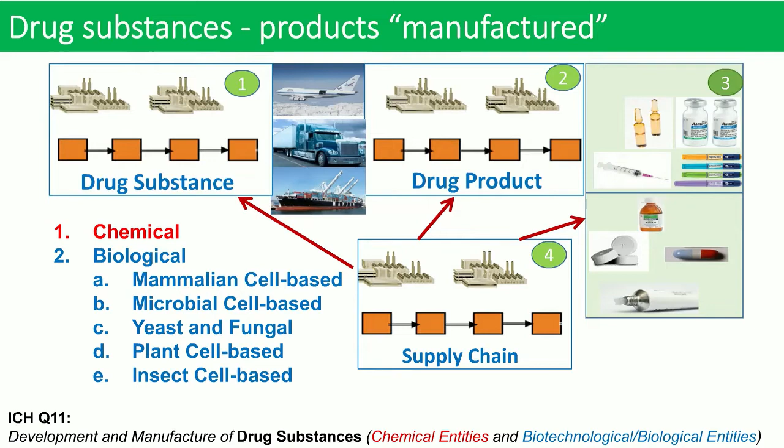We basically manufacture and most of the time ship across continent, across countries, or across states. I'll use the definition from ICHQ11 for drug substance - chemical entities, which we're not going to talk about today, but the biotechnology biological entities, to make it uniform so we're not calling it small molecule, large molecule, or API.

MIT, Dr. Trout, generated this curve within the last few years, trying to look at what we've done to improve manufacturing platforms. Up to 2005, 2006, manufacturing was traditional. If you look at the curve - OAE, quality, TPT, those terms are defined on the slides - you see basically not much, no matter what they've done, not much improved.

Then the industry went into lean manufacturing, Six Sigma, whatever they could do on existing operations, and you see some improvement, but not a lot. Then firms and institutions started doing different things, which we call continuous manufacturing today. There's integrated continuous manufacturing, hybrid, different types, and I'll mention some of those in the presentation today. But you see the improvement is drastic, and the hope is by 2020 we have a lot of those operations in place.

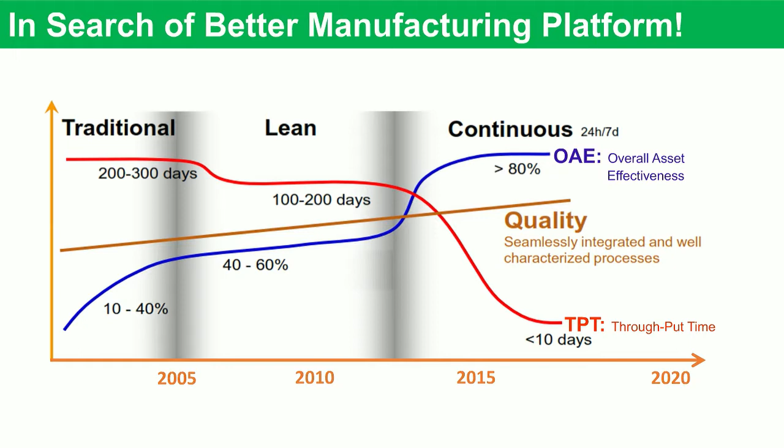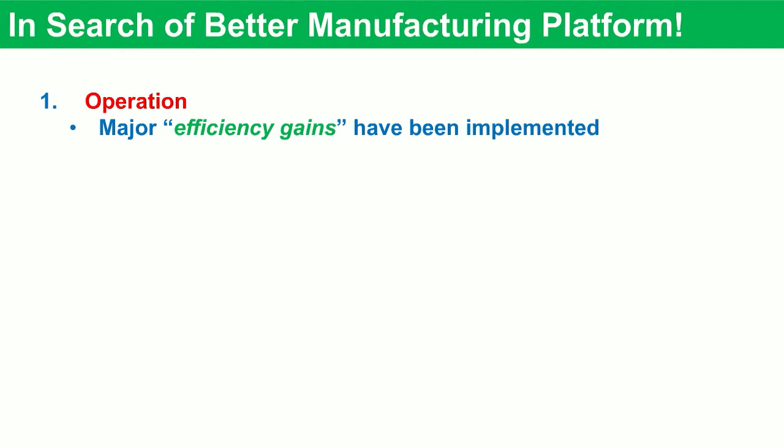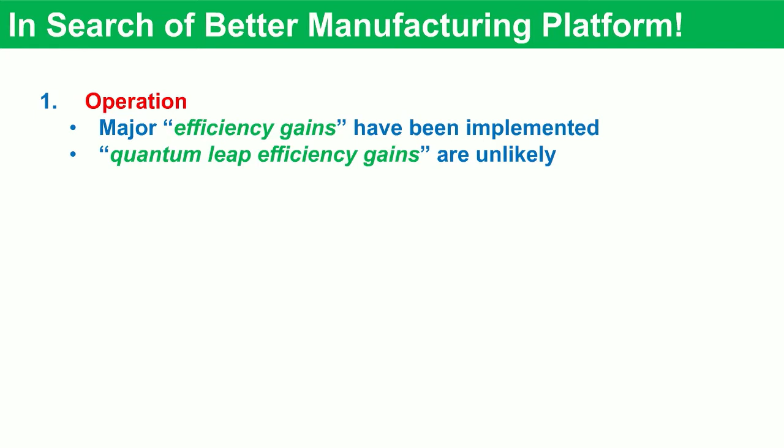So the search for better manufacturing platforms - if we look at batch manufacturing operation, major efficiency gains have been implemented based on what you saw from the curve. Quantum leap efficiency gains are unlikely. We've reached basically the maximum we can get out of that by improving yield, improving titer, and improving a lot of things.

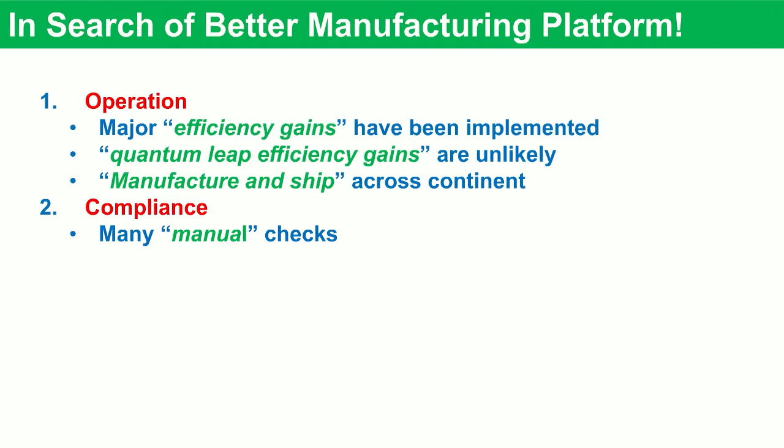Manufacture and ship across continent, as I described earlier. On the compliance side, you get many manual checks, deviations and investigations are difficult to root cause analyze. When you have a problem, you go back and there isn't a whole lot of information - you have to dig into a lot of batch records, a lot of documents to find what's going on. On the quality side, the biggest problem is you rely on in-process and end-product testing, so you hold the product sometimes two weeks to be able to release it because it takes time to test.

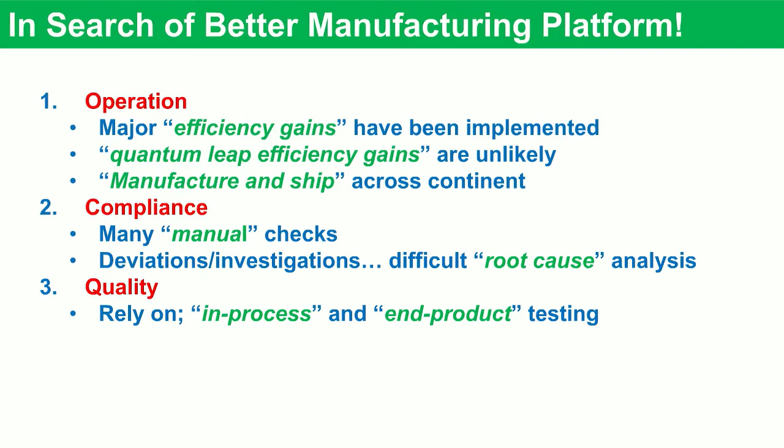So where do we go from here? On the upstream side, if I'm looking at a fed batch system, the old system looked like this - a conventional fed batch system. You see a lot of big tanks, large facilities, going up to 25K liters or 30, depending on the type of cells we're manufacturing. When we improved it, we came up with single use and many other things - still a lot better than the old type, but still not really what we need.

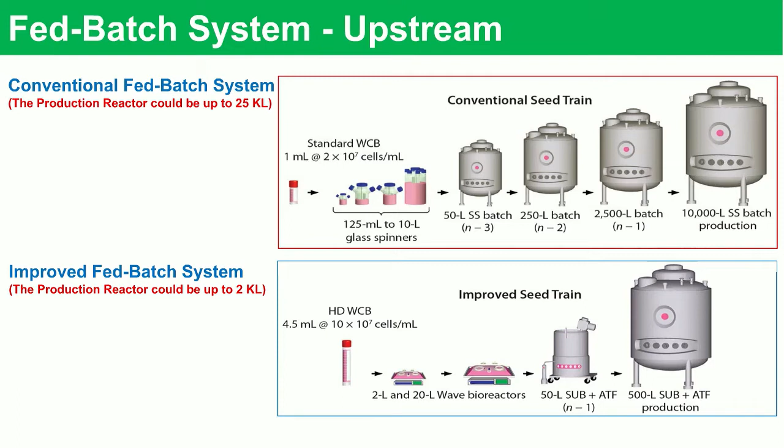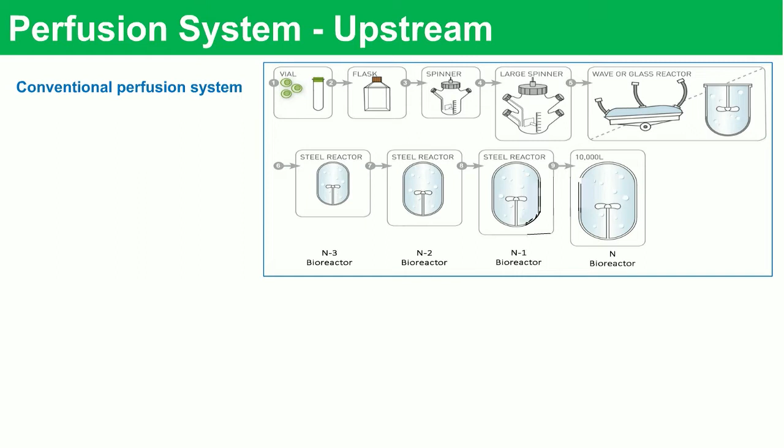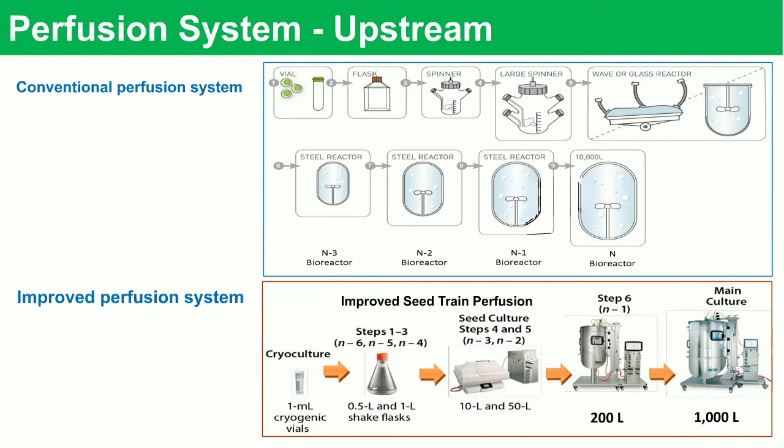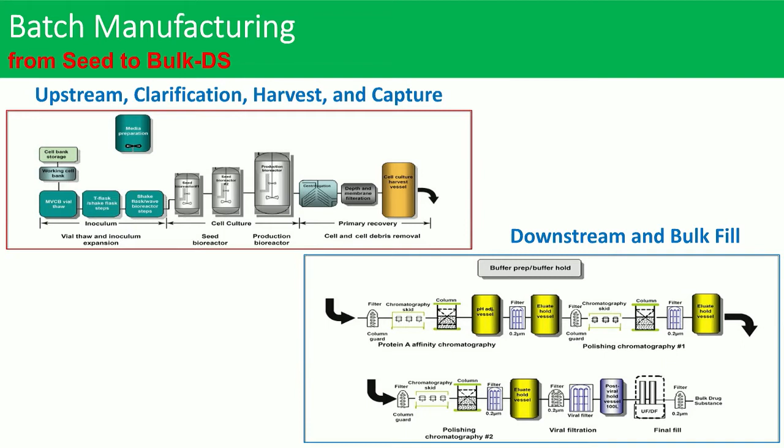It's still batch manufacturing. On the perfusion side, we have the old system, which is very complicated, going up to somewhere around 10,000 liters. We improved it again using a lot of technology, automation, single use, but it's still a batch system. So total batch manufacturing, depending on what you're manufacturing, has a similarity to what you see on the slide - given some equipment more or less, but that's what it looked like. It's very complicated, very large, facility and utility intensive, environmentally intensive. So we want to go to something different, which we call continuous manufacturing.

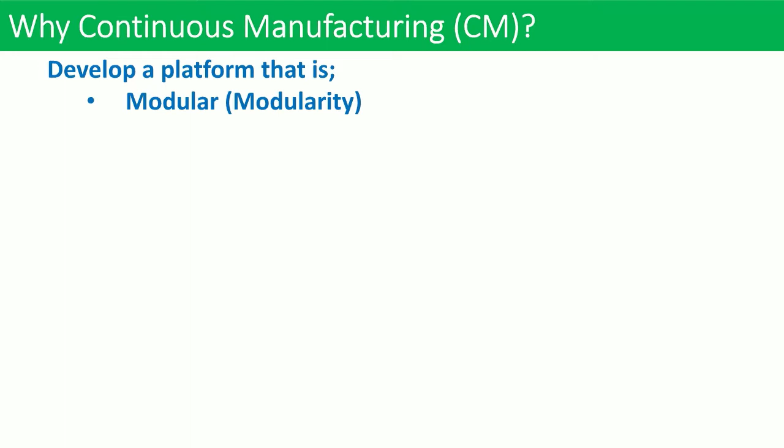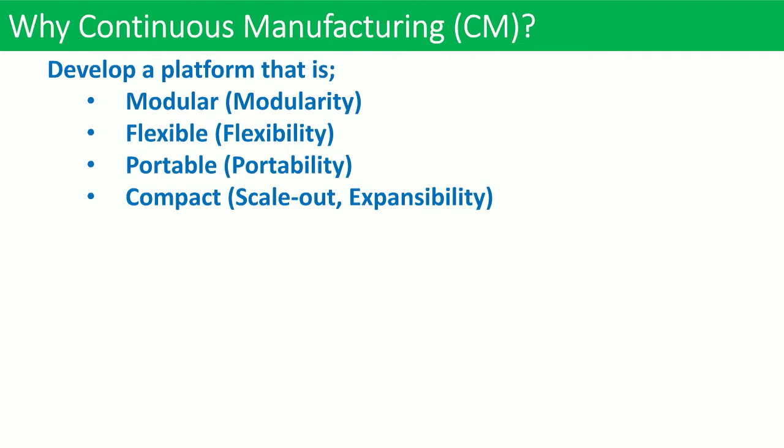Develop a platform that is modular, flexible, portable, compact. So instead of doing a scale up, we do scale out. It's less real estate, small footprint, cost effective, optimized, friendly on changeover so we can do multi-product. And one thing not actually in the bullet here - it is a closed system, so we can have more than one product side by side.

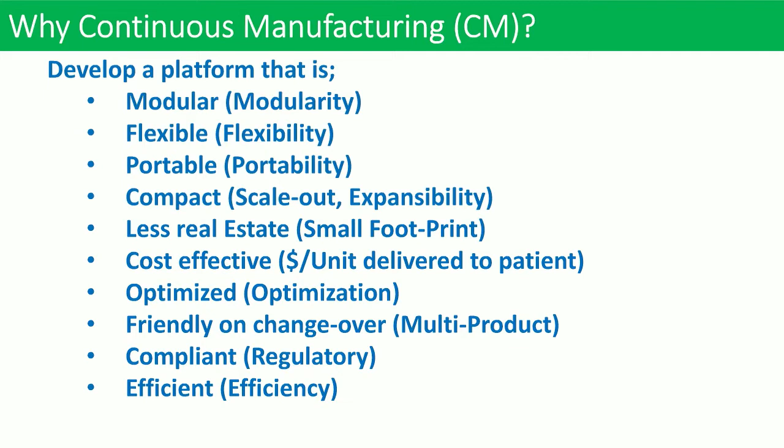Then it's compliant, regulators like it as you'll see from my presentation, efficient, and sustainable. So how can we do that? What we need basically here is some actions to be taken.

We need a steady state. We need high cell density, high titer. We need high productivity, volumetric flow rate, because that is not important in batch manufacturing - actually it's not looked at, but we need it when we want to do continuous manufacturing. Continuous flow from bioreactor to capture - to make it non-batch, you have to continuously make product over and over, days at a time. And we need a continuous capture system that can support the fermentation.

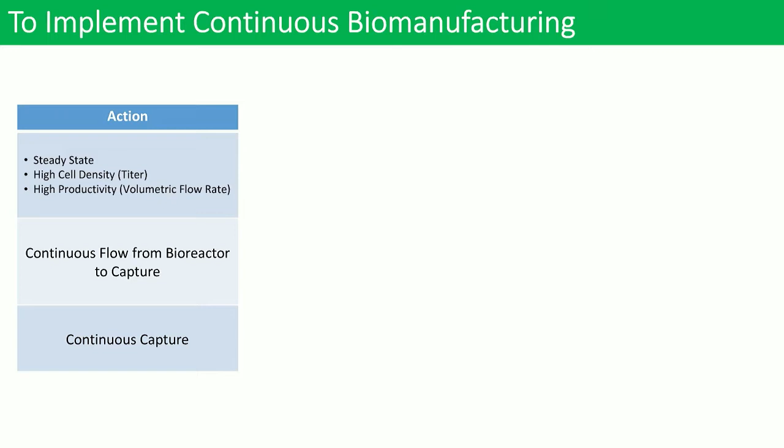The key technologies needed: we need high speed production rate, we need a low perfusion rate. Also we need simultaneous cell separation and clarification, so we get out of that dilemma of batch manufacturing. Then we need periodic counter current chromatography, basically PCC. Now there are other technologies, but they're not widely sought because there's not much data on them. So if somebody is working on other ones, I'm not saying here you have to use only this technology, but this technology is proven today.

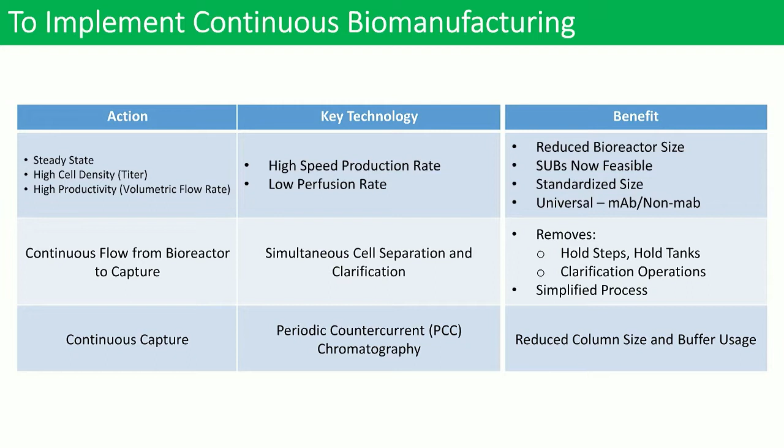Then the benefit you get out of it, you get reduced bioreactor size. You can use a single-use bioreactor because the volume is small. You can basically make a standard size line that you can manufacture monoclonal and non-monoclonal antibodies. It removes the hold steps and hold tanks, which the batch process needs, and those are big volume. You remove the clarification operation and simplify the process. So what you end up with is reduced column size and buffer usage, which is inherent in batch manufacturing.

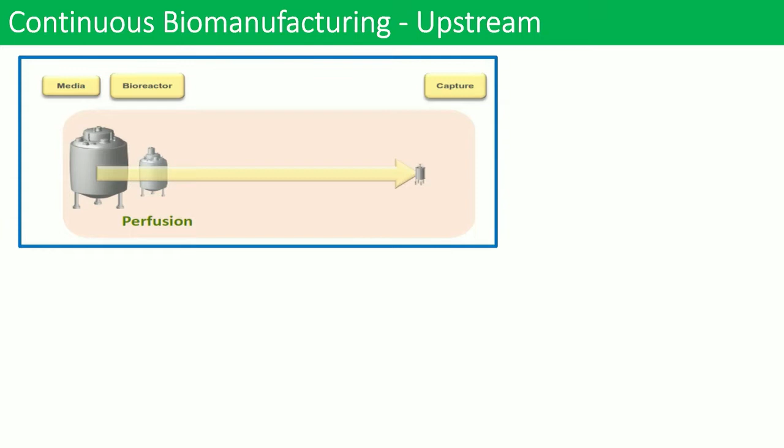Now, what I just mentioned is done on the clinical platform, not in an approved product.

So to get into continuous manufacturing, you need to do more than just reduce the tank size. You need to have very good process knowledge. You have to know your process. Without knowing your process, you really can't do a lot of modification on the system.

You need to have a robust equipment system integration and design. You need the support of vendors and service providers to give you that and work with you to make sure, based on your cell base or microbial base, that system will work.

And then you do need to have good control with PAT and QbD. Because with a hierarchy of good control, feedback, feed forward, these systems can talk to each other and produce without interruption by adjusting themselves. You don't want a person to be involved in modifying things. So that is key.

And if you look at all the regulatory publications and discussions, that's what they talk about.

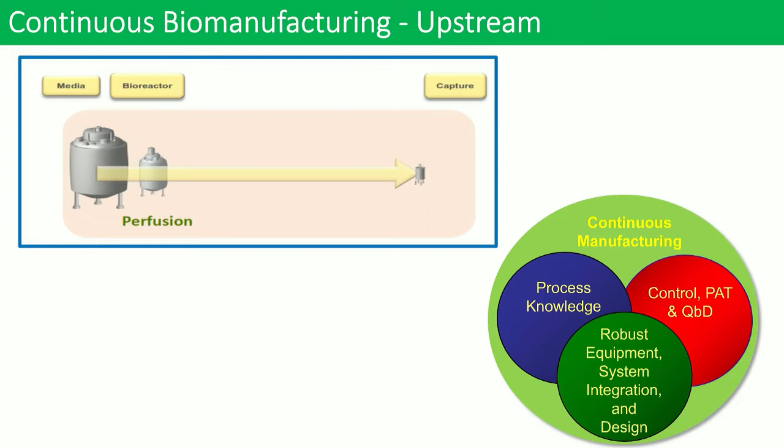On the downstream side, well, actually the slide I'm going to go through is the end of the capture and the downstream, so it kind of applies to both. Let me say this slide is kind of in between.

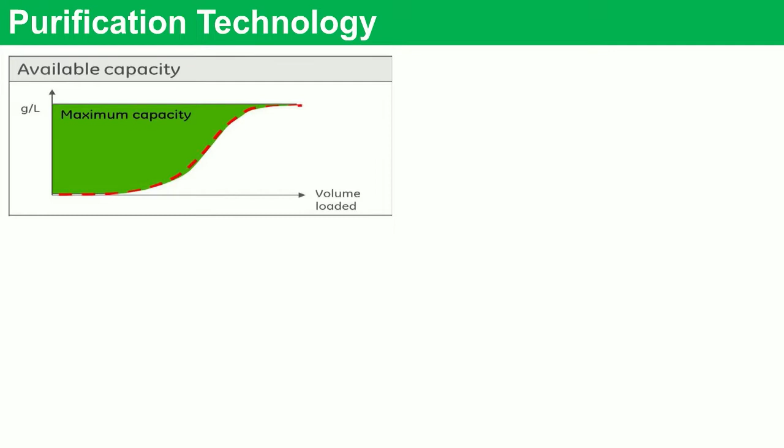So if you have a column and you're using a single column, that's what it looks like. The green part is the capacity of the resin. The white part, basically nothing gets captured. So if I am loading up my column, when I reach like 10% and I have a very expensive product, now you have a product breakthrough. And that product breakthrough will basically go and you lose product. There's nothing going to capture it. It's got to go in the waste.

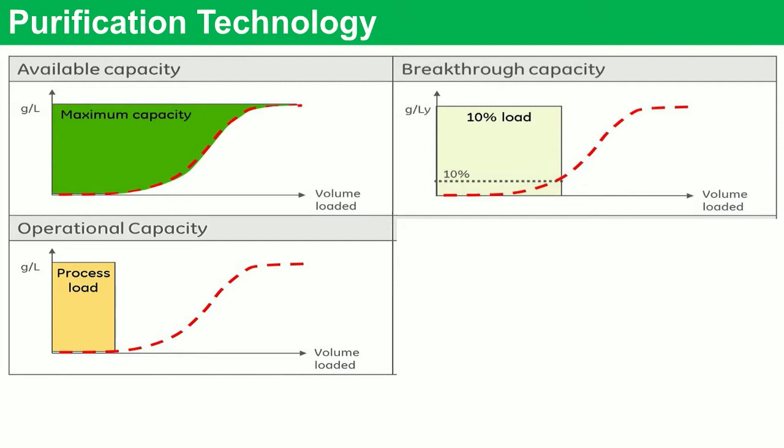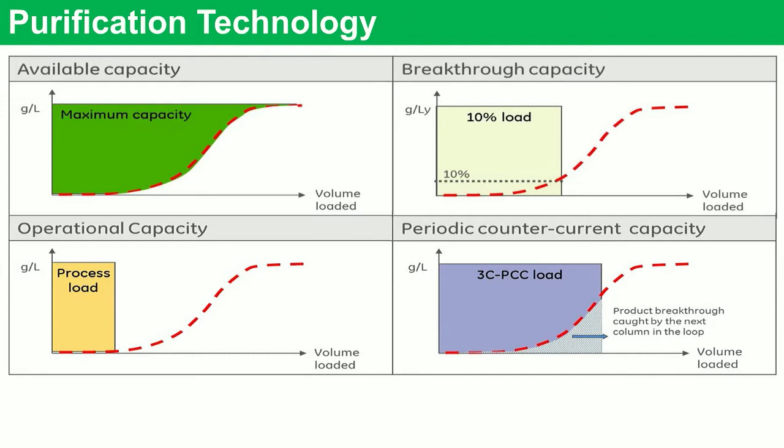So to avoid that, I kind of cut back and load up the column somewhere around 10% or less. Now, if I am doing continuous manufacturing, I use multi-columns. This is a discussion, it depends on a lot of testing being done. Some people like three, I've seen two, and two is really difficult to control. I am not for it, but some people have done the testing and think it works. But I think 3 or 4 is kind of the optimal to use. Whatever breaks through from the column will go to the next column, so you lose no product whatsoever. So you have peace of mind when you take the column up to whatever loading you are happy with.

And that's what the switch cycle will look like. It kind of goes, basically, you take the column off, you unload it, and you bring it back on, and so forth.

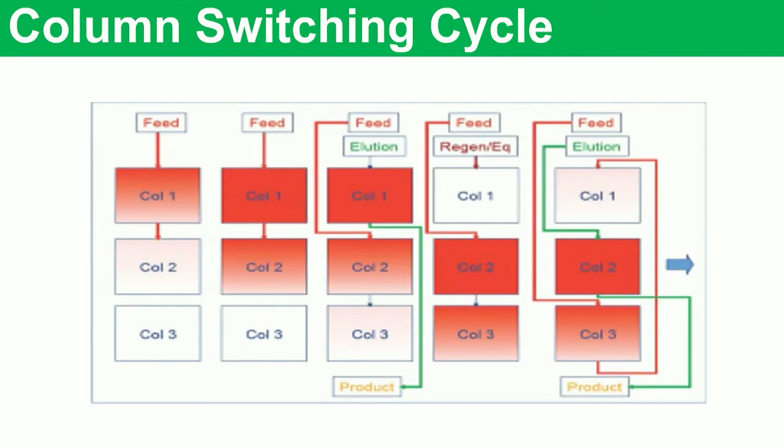So looking at fully automated column switching based on PAT: the column in the beginning will read 100% incoming product plus some impurities, and the UV on the outlet will show you 0. Then when you are at T1, the inlet will still show the same thing, but the outlet shows somewhere around 3%, with some impurities getting discharged on the waste side. And at T2, you go up to about 70% plus the impurities going out that get captured by the next column. So basically that is the curve this thing is going to ride like.

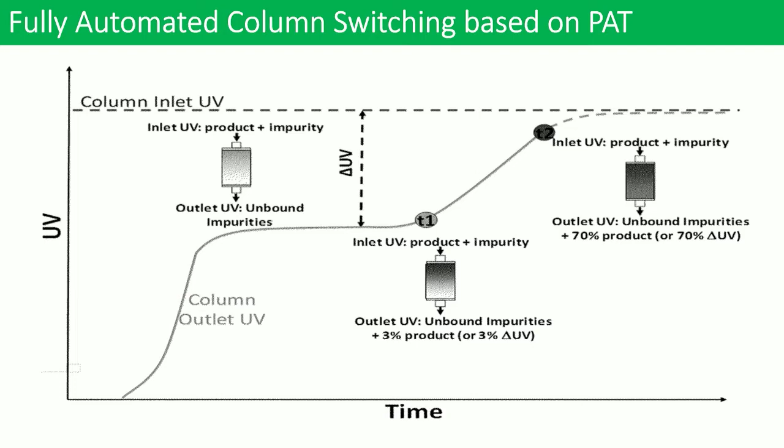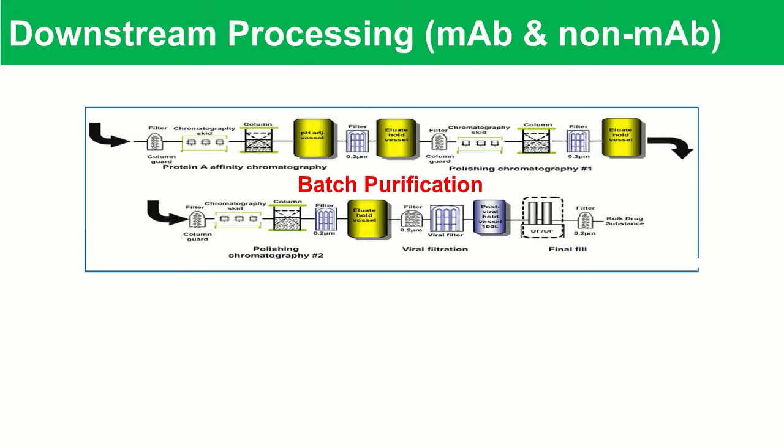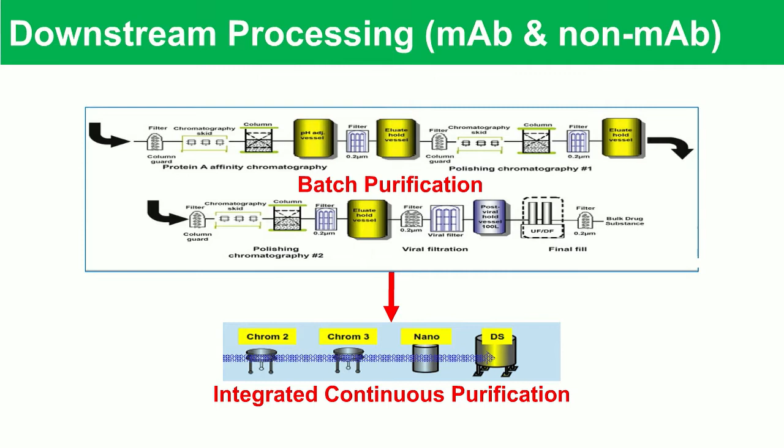Now the downstream processing, either monoclonal antibodies or non-monoclonal antibodies, will look like this. That's the old one which I showed you earlier. When I modify it, I go to about 3 or 4 pieces of equipment that's integrated together, much simplified down to getting your drug substance in the last tank, which is basically the end product.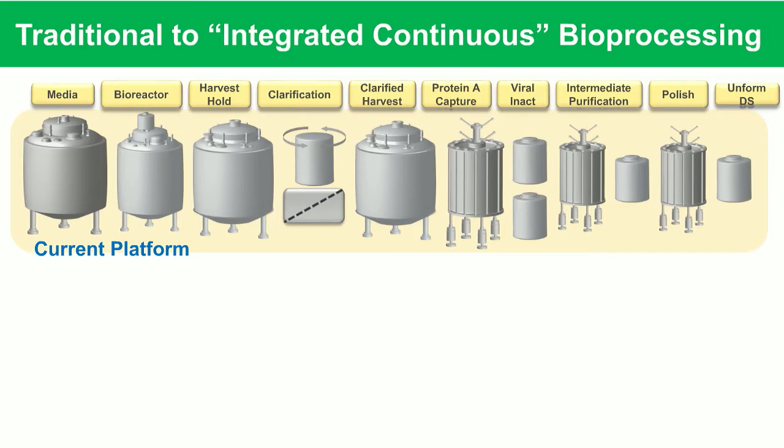So if I am looking at the current batch manufacturing, fed batch in this case, this is what I have from beginning to end. If I modify this to go to continuous manufacturing, I will reduce the size of my media tank and my bioreactor. I eliminate the clarification and harvest steps, take out the clarified harvest tank, then reduce my capture column.

So you see that is huge. If you look at facilities throughout this country or throughout the world, it doesn't matter where you go, they cost $1 billion to build and they are huge. This is now becoming much smaller, and you will see in the next few slides.

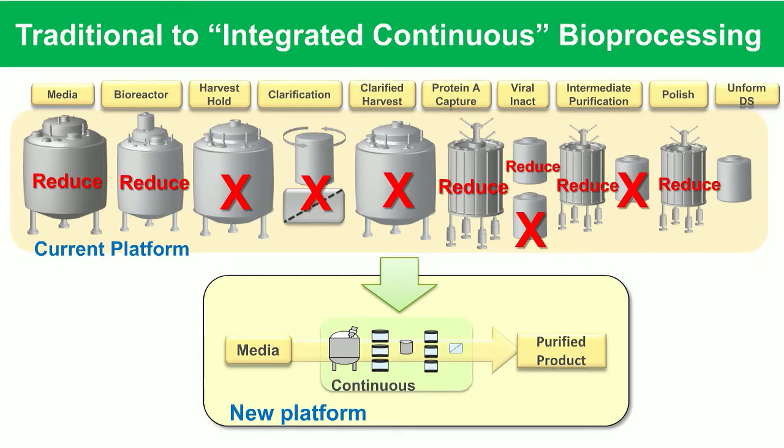So when I reduce this, it will look like that. An ICB platform, basically a small footprint, it's a closed system. That's what you have to remember, it's a closed system. So really I don't have to worry about putting it in a less grade or classified area.

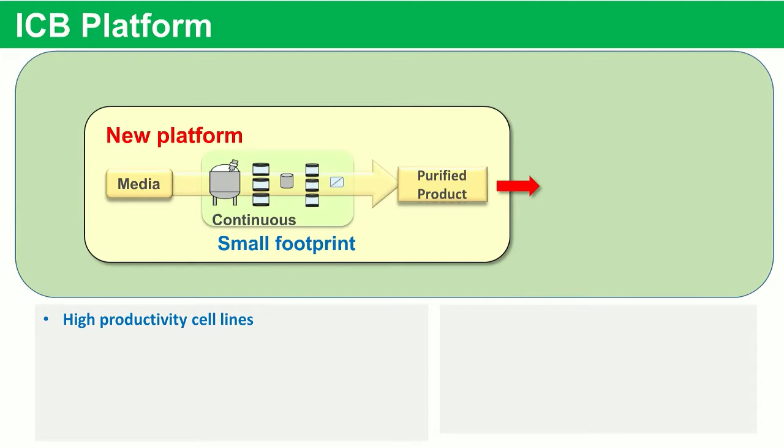It has high productivity cell lines. It has chemically defined media. Now I have to get media to work continuously with my cell line. It has a universal standard platform. I can use it for various proteins.

I have a steady state metabolism. I do have basically a closed system, as I said, so I can minimize microbial issues. I have compatible disposable technology. Then there is no hold tank.

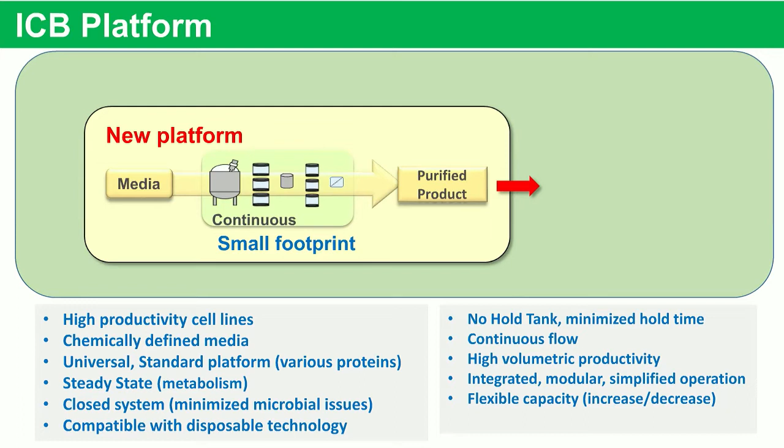There is continuous flow. There is high volumetric productivity. There is an integrated, modular, simplified protein operation. And then I have flexible capacity. I can decrease or increase my capacity based on what I need. And I have basically no scale up needed. I can scale out. So if I want 2 units, I just basically...

One thing is not basically on the slide, let me explain here. If I go to the regulatory, it doesn't matter if it's FDA, EMA, or whatever regulatory body, some accept continuous manufacturing and not everybody accepts it yet. So if I get my documentation and licensing to operate this unit, and I copy it exactly the same way, I have a simplified approval because I just copied exactly what I had and they approved it in the past. So I can double my capacity in no time, I can go to 4 times, and if I have multi-product, I can put them in the same space since they are a closed system.

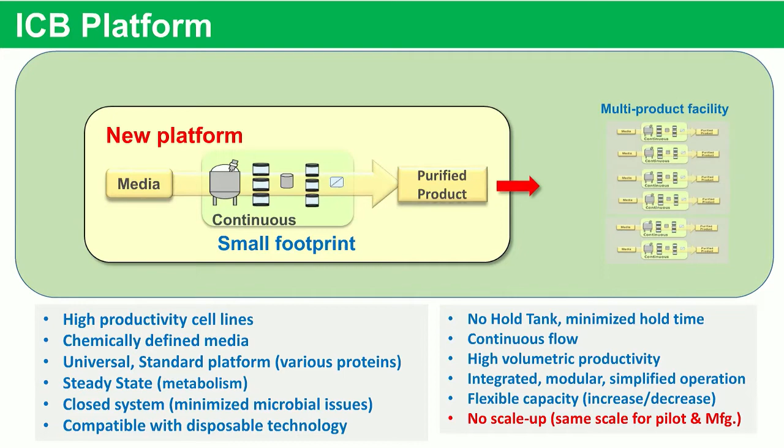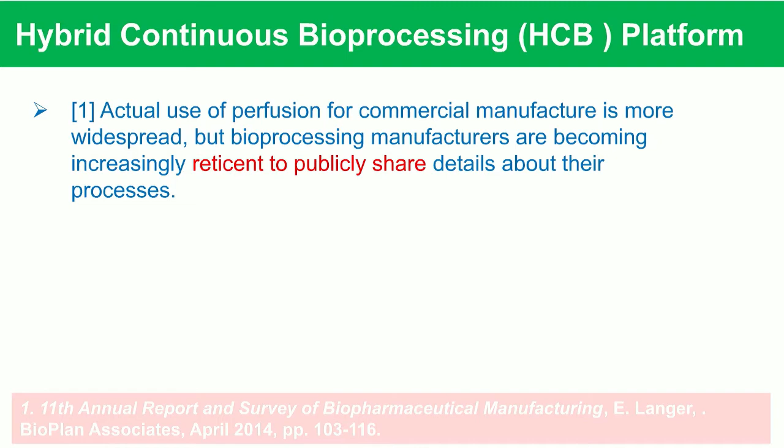So going from here, the hybrid continuous manufacturing I talked about earlier, there was a survey done, that document at the bottom is what I gave as reference. It says actual use of perfusion for commercial manufacture is more widespread, but bioprocessing manufacturers are becoming increasingly reticent to publicly share details about their process. And that's the reality of this new technology.

So to point out, this information came through the survey, it's not basically hearsay. So Genzyme, Bayer, Janssen, Merck-Serono, Novartis, and Lonza Manufacturing for Lilly, they manufacture about 19 products. Some of them are monoclonal antibodies, some are not, they're all protein products, and they have an annual gross income of 20 billion. So you can see the technology is already used in a hybrid format, not from seed to drug substance, but it is used, it's out there.

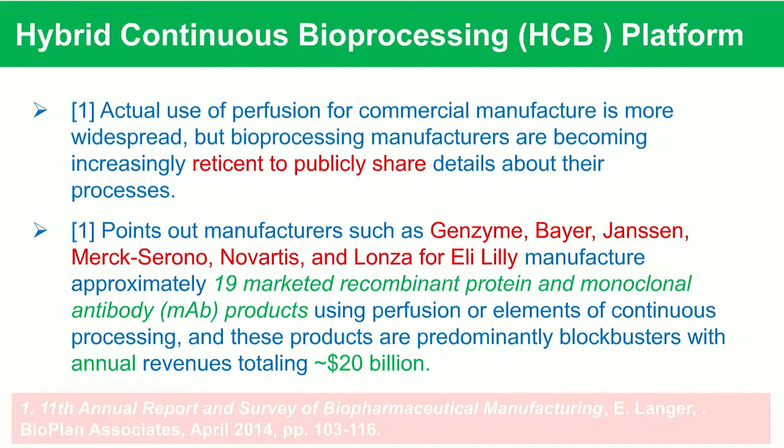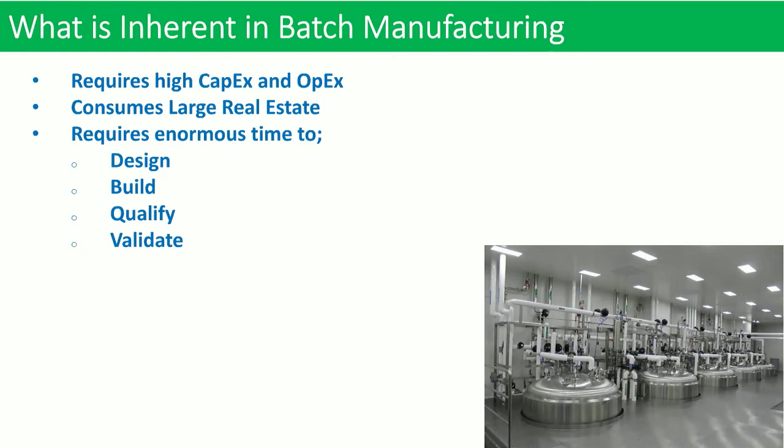So what is inherent in batch manufacturing? We actually talked about this already. It requires high CapEx and OpEx, consumes large real estate, requires enormous time to design, build, validate and qualify, requires large staff to operate. At the same time, the demand for capacity is going up, and local manufacturing is now sought. So if you want local manufacturing, you can't just take 7 years and build a huge facility. You'd rather build a new facility in 1 or 2 years.

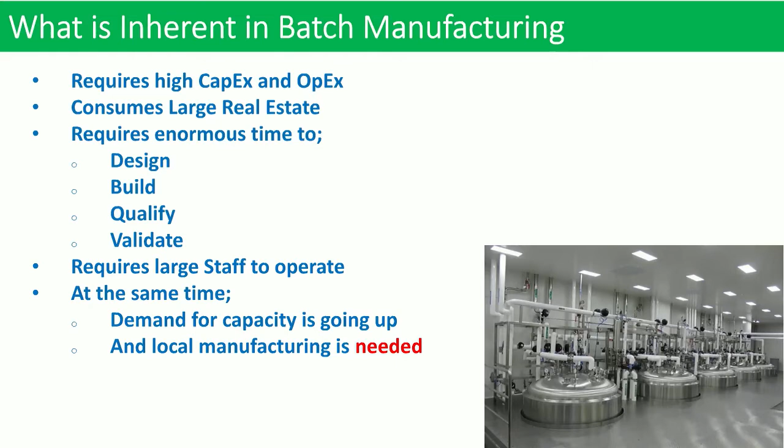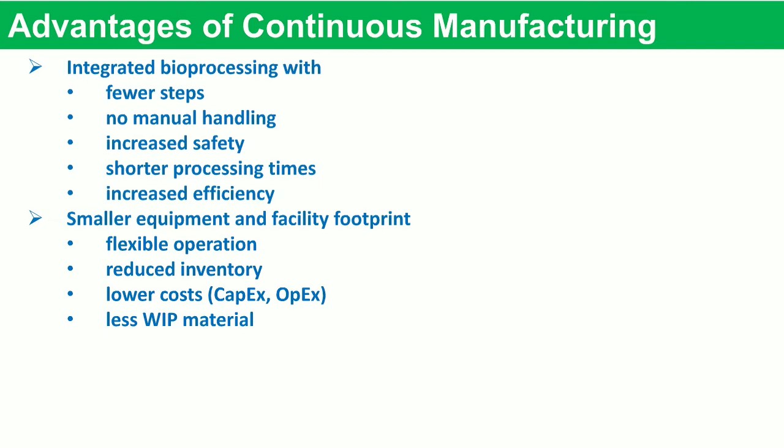Advantage of continuous manufacturing, we almost mentioned every one of them. Has fewer steps, no manual handling, increased safety, shorter processing time, increased efficiency, smaller equipment and facility footprint, flexible operation, reduced inventory, lower cost, CapEx and OpEx, less work in progress material. Because with batch manufacturing, you always have to put it aside and test it, then after quarantine and approval, you can release it. That's a hurdle you don't have anymore. Smaller ecological footprint, sustainability.

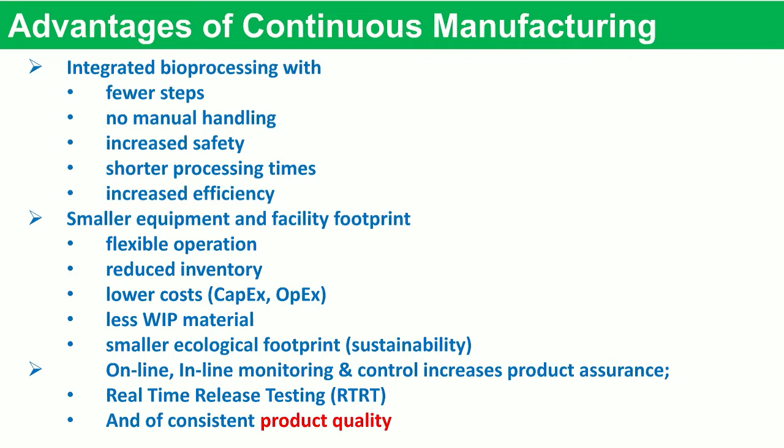Online and inline monitoring and control increases product assurance. Real-time release testing, which is now documented in EMA guidance, ensures consistent product quality going to the patient.

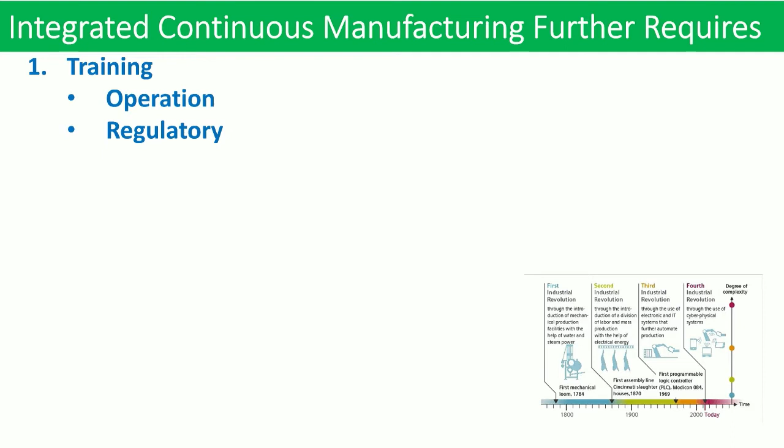What a manufacturer further requires is training and operation, and you need to get regulatory approval. Now we have harmonization on the batch manufacturing side, but not on the regulatory side. Each regulatory body has its own nuances you have to go through, so some harmonization is required between regulators so you can manufacture the same thing under different regulatory regimes.

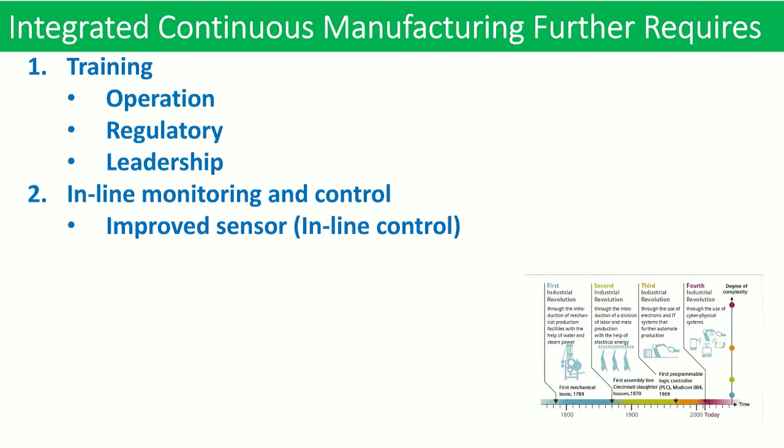Leadership needs to be trained - that is the way of the future. Inline monitoring and control requires more improvement; we need better sensors to do inline rather than at-line or online monitoring. We need to improve technology to employ Industry 4.0 or the IIoT.

How to handle fault conditions is an item where, if I have some problem, there isn't a whole lot of data out there on how to handle it. So there are ways, and as I said, we need to implement Industry 4.0, which we're now calling Pharma 4.0, trying to run parallel with Industry 4.0.

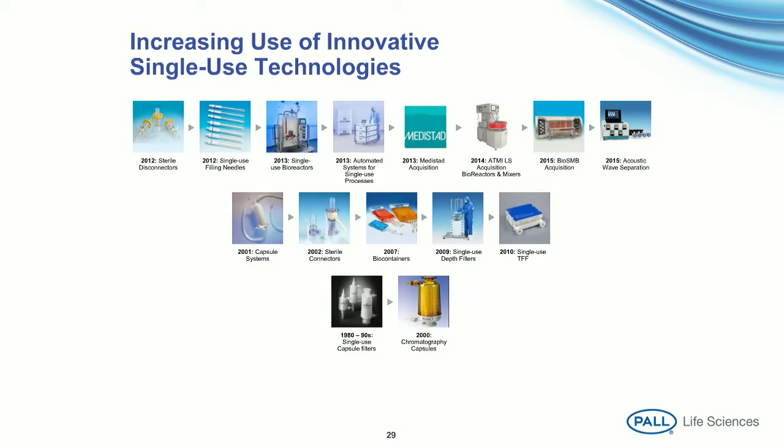Robert mentioned the term lean in manufacturing, and lean manufacturing has really gained importance over recent years. It was pioneered by Toyota as a way to reduce waste, and there's a lot of waste within a manufacturing operation. If you can reduce waste and come up with a so-called lean approach, you end up with a much higher quality and much more productive process. The car is an example of a lean manufacturing process, often referred to as one-piece flow, where the components of the car come together down a production line and a car drives off regularly.

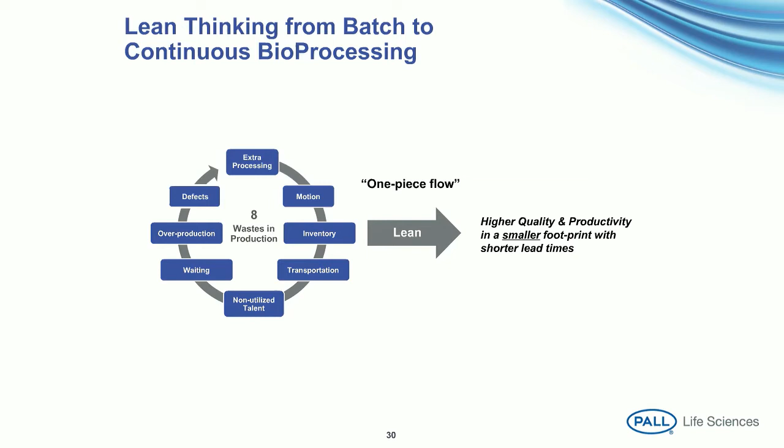Imagine if you can that the protein molecule is the piece - then we can move towards a lean approach in biopharmaceutical manufacturing.

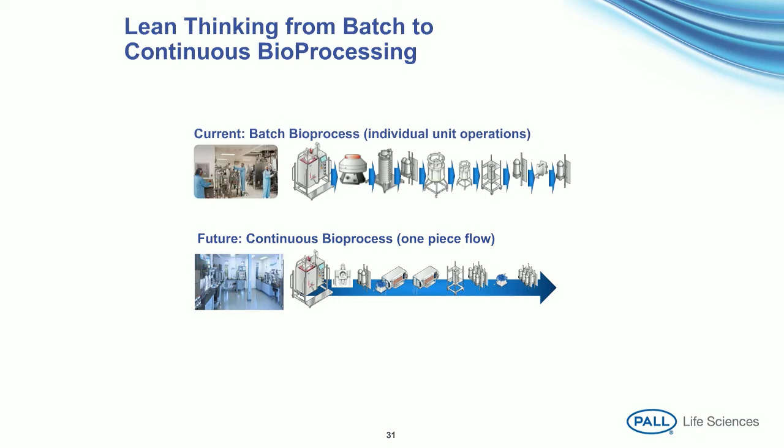All we've done is taken this process and evolved it into a continuous one - it really is an evolution. We're taking the same unit operations, just doing them slightly differently, but retaining the same buffers, the same chromatography resins, the same filters, etc. That's shown in the bottom panel, where again we start with the bioreactor, go through clarification and polishing, continuous chromatography, and then a continuous UF/DF process.

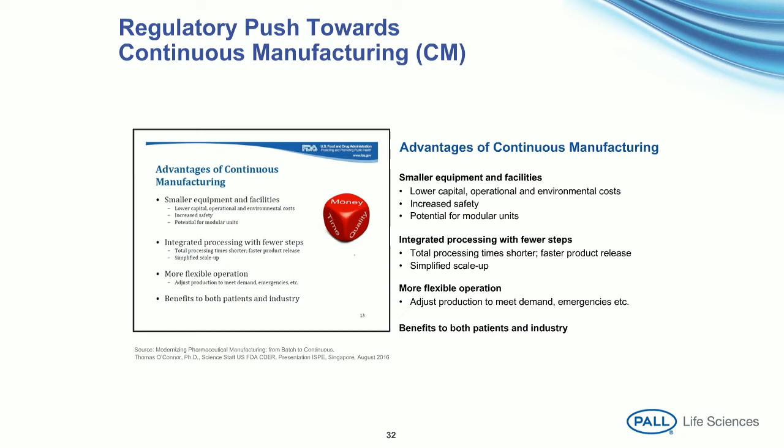There was discussion by Robert on regulatory, and people do express regulatory concerns about moving to continuous, but we see a lot of presentations by regulatory authorities - this is a slide presented by the FDA less than a year ago. I think an important milestone was in 2016, when Janssen got approval to convert a batch process to continuous, albeit for a small molecule. So the regulators are now supporting continuous processing, and their presence is much more visible in this area.

So what I've summarized on this slide are our three core technologies that we have leveraged to move towards a continuous process. So for continuous clarification, we use a technology called acoustic wave separation technology, where Pall has an exclusive license from a company called FloDesign Sonics that exploits a low frequency sound wave to do a solid liquid separation.

For continuous chromatography, we acquired the intellectual property assets from Tarpon Biosystems, which provides a single-use valve cassette that enables you to perform multi-column chromatography.

And the final core technology is single-pass tangential flow filtration. We have an exclusive license from SPF Innovations to produce products and practice single-pass TFF. That enables both concentration, but also, as you'll see presently, inline diafiltration to be performed in a continuous manner.

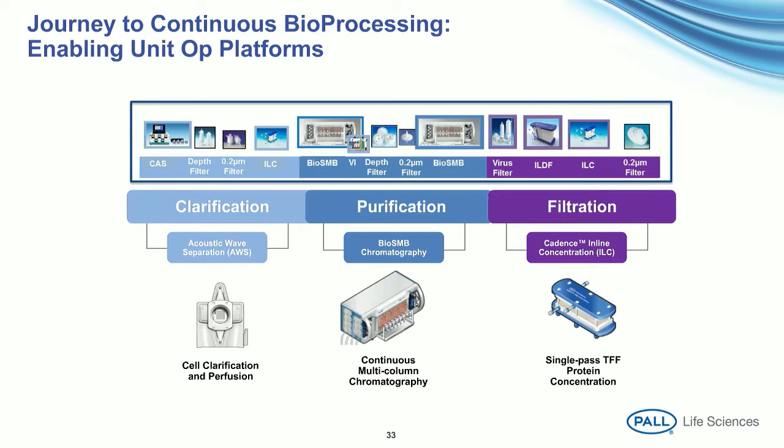These three core technologies enable us to put together a complete continuous process based on single-use technologies. But it's one thing talking about it, it's another thing doing it. So in this slide here, you can see an image of our continuous bioprocessing laboratory. This lab is real. It's situated in Westborough, Massachusetts.

It has a footprint of 36 square meters. And if I just briefly walk you through from left to right, we have cell culture at the left. We have the Cadence acoustic separator, which will do the clarification. There's polishing depth filters. We then can do an optional pre-concentration of the feed to potentially improve the productivity of the protein A capture chromatography.

If we move to the back of the lab, we have a viral inactivation step, followed by a second multi-column chromatography system, which does the polishing. Then we do a virus filtration, followed by the UF/DF using inline diafiltration and single-pass tangential flow filtration before the bulk drug substance passes through a final sterilizing grade filter.

In March last year, we were able to produce just over 2 grams per hour of pure mAb from this lab. And today, through integrating the unit operations together and intensifying the process, we're able to produce in excess of 100 grams of monoclonal in 24 hours. This means that a laboratory of this size potentially can produce, in a relatively short period of time, sufficient material that could get you through preclinical into early stage clinical.

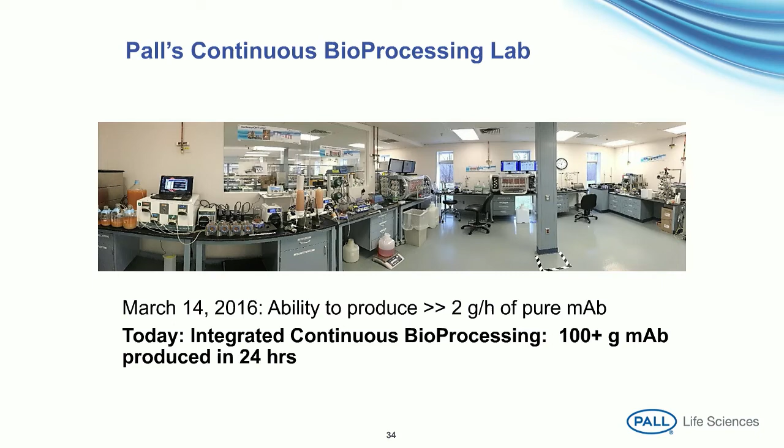So this is a data set on the 100 gram per day manufacture. We produced 107.2 grams of monoclonal antibody in just under 21 hours. In terms of the quality of the product, we've got very good host cell protein clearance and very low aggregate levels. Some of this data has been presented at various conferences, and you can see various links to it from the Pall.com website.

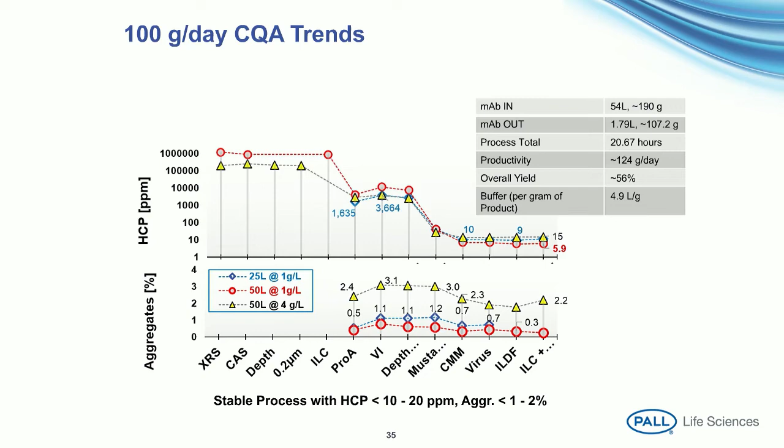But this is all very well, but these laboratory processes need to be scaled up to a GMP environment. And we have a lot of experience in scaling up filtration, but we do need solutions to scale up both the acoustic wave separation technology and the multi-column chromatography technology.

So the Cadence acoustic separator, the benchtop unit, operates at a flow rate of around 4 liters per hour. This slide here shows scalability of the Cadence acoustic chambers, up to 50 liters an hour per chamber. By operating the chambers in parallel, we will be able to operate at flow rates of up to 350 liters an hour using the Cadence acoustic separator process system, which we will be introducing later this year.

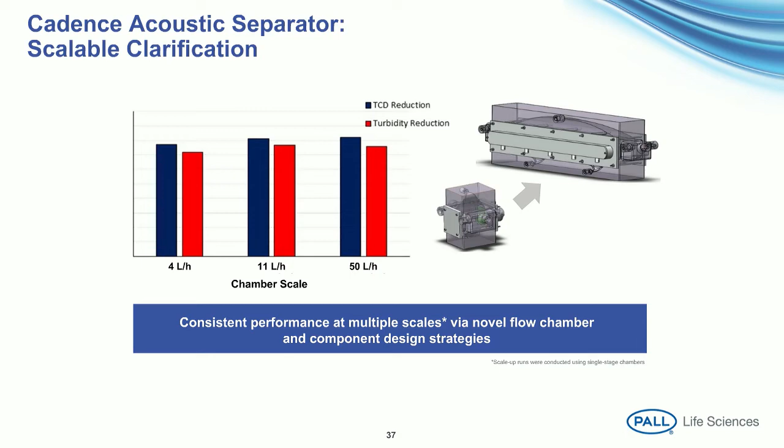We've scaled up the continuous chromatography. On the image on the left is the BioSMB PD. The image on the right is the Cadence BioSMB process, and this is a full-scale GMP-compliant system. We have 8-column capability on the process systems, which we believe gives you flexibility for even the higher antibody titers and higher product titers that are coming through.

It is a single-use system. One of the key features is that the single-use flow path can be exchanged within 30 minutes, and the system also operates at up to 350 liters an hour, which is the same flow rate that the Cadence acoustic separator process will operate at, and will enable you to clarify and do the primary capture from a 2,000 liter bioreactor in less than 6 hours.

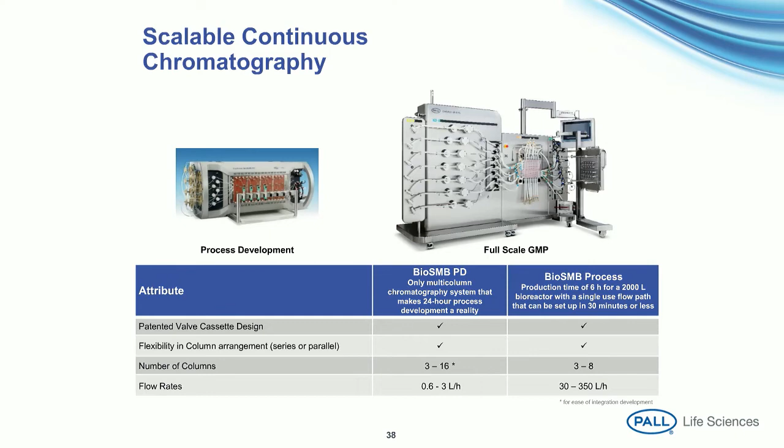So the question is, does it work? Well, this is data produced with our colleagues at Merck. They had a batch process which had a productivity of 16 grams of monoclonal antibody per liter of protein A per hour. They converted it onto the BioSMB PD, the benchtop system, and were able to increase the productivity to 56 grams of antibody per liter of protein A per hour, and then scaled it up 150-fold onto the BioSMB process.

Again, maintaining a productivity of 56 grams per liter of protein A per hour. And at the bottom, Merck compared the batch process to the multi-column process at scale. In their view, by going from batch to multi-column, they would save 16 liters of protein A resin for the chromatographic run, offering a cost saving of the best part of $200,000, depending on the price you're paying for the protein A resin. So the process economics of continuous chromatography really, we do think, have been proven here.

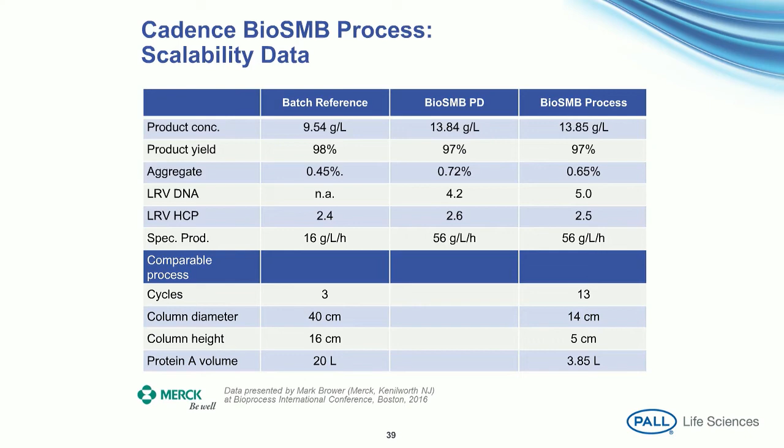So this slide summarizes the data set that we got. In terms of the number of columns, we found that 5 columns was the optimal configuration. The batch process was translated to continuous and scaled up in less than 3 weeks, and we were able to demonstrate a 150-fold scale-up of the multi-column chromatography process.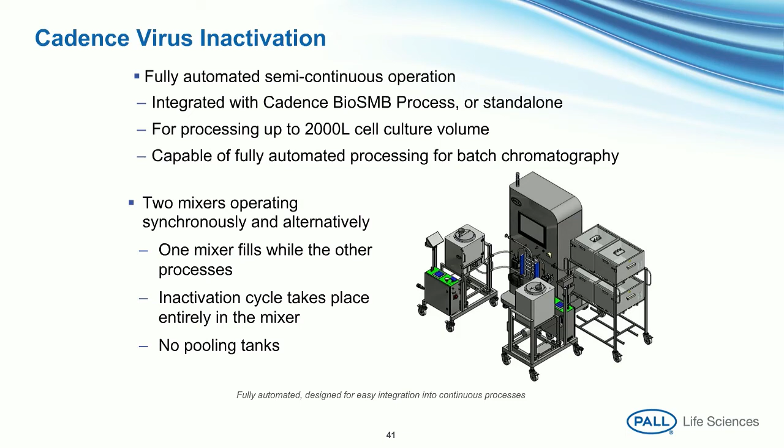In terms of the portfolio of products, we have available now the Cadence Acoustic Separator PD, and later this year we will introduce the Cadence Acoustic Separator process, the full-scale GMP compliant system. We have the Cadence BioSMB PD and BioSMB process systems already available, and as I mentioned, in September we plan on launching the Cadence virus inactivation skid. We have a new range of Pegasus Prime virus filters which give very high throughput and really enable continuous virus filtration. We're introducing an acoustic wave separation system for perfusion bioreactors as well, to do the clarification of the perfusion draw-off, and that system will be introduced at PD scale towards the end of this calendar year.

We have single-pass TFF technologies. We have the inline concentrator and also single-pass TFF systems already available, and we have leveraged the technology to do inline diafiltration. The Cadence inline diafiltration system will again be introduced later this year.